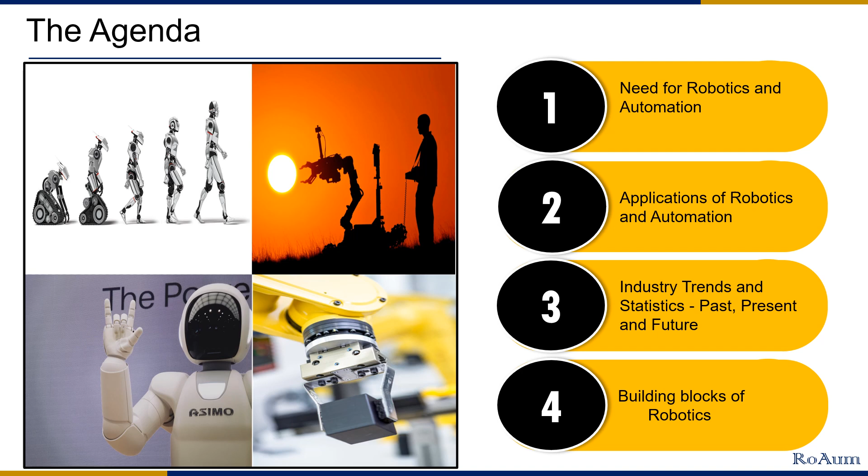Historically, robotics has been in use for automating routine or repeat jobs. Repeat jobs basically involve a limited set of operations that as a whole are repeated over and over again for a long period of time, for example, assembling parts of a vehicle or a machine in a factory. These were automated to improve productivity and efficiency, reduce human error and hence reduce wastage, and make optimal usage of available resources, infrastructure and investments.

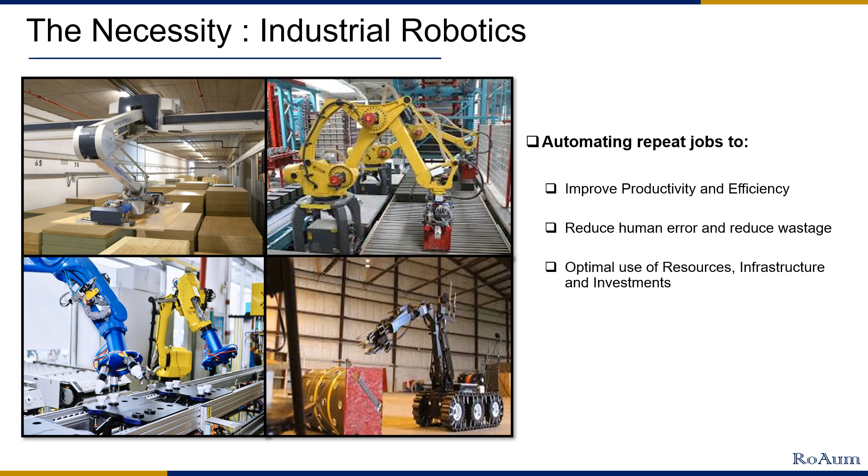Automotive industry is an early adopter of automation and robotics. The main applications are welding of auto parts in assembly lines, painting for getting consistent finish and also for handling highly toxic chemicals in paint, moving heavy and bulk materials inside the factory, and assembling of pumps, motors at high speed on fast moving assembly lines.

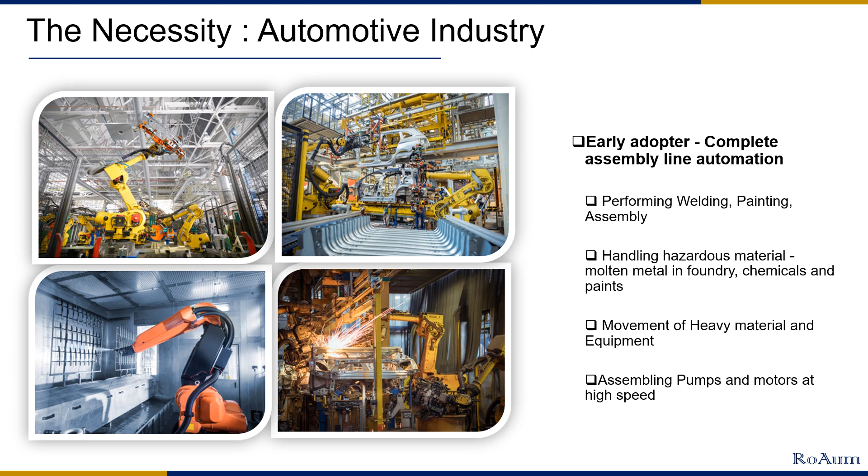Industry 4.0 is an extension of the earlier automation effort, and it is a step towards going beyond complete factory automation, where the manufacturing plant is highly integrated with business systems and analytics using process automation, IoT and cloud computing.

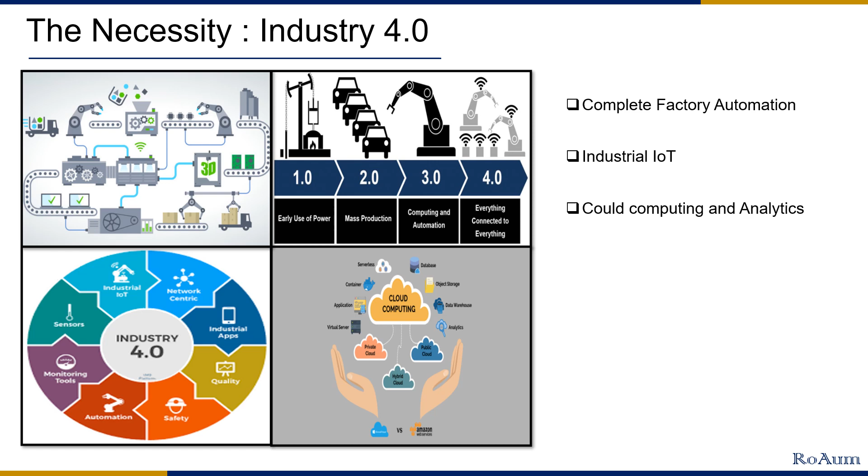The key principles of Industry 4.0 are interconnection of various entities in manufacturing, that is machines, human beings and systems that constitute the traditional assembly line; dynamic collection, dissemination and processing of data and decision making; reducing human intervention in decision making for routine activities, while human decision making is used in critical and important decisions. Robotics and automation forms an important pillar on which Industry 4.0 is built.

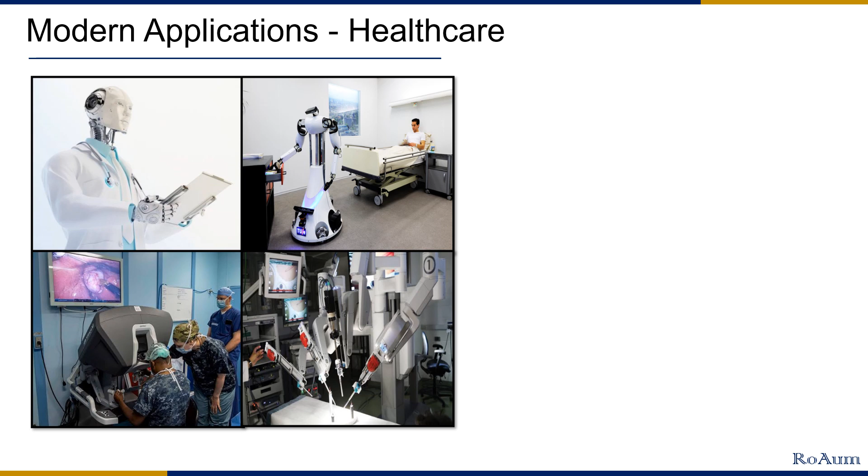The more recent and advanced use of robotics has been to augment and enhance human abilities and skills. For example, in healthcare and medical applications, assistant robots are being used for high precision procedures like minimally invasive surgeries and biopsies. Telepresence and robotics is used to examine and test patients in rural or remote locations.

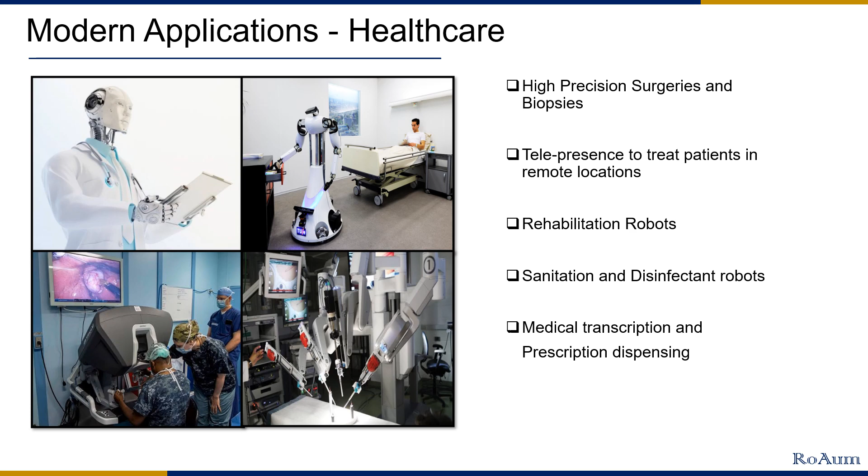Rehabilitation robots are used to improve the quality of life of the disabled by providing assistance in mobility, strength and coordination, whereas they are used to help the elderly in assisted living. Sanitation and disinfection robots are employed to combat the increase in antibiotic resistant bacteria and outbreak of deadly infections like Ebola, Corona and H1N1. Robotics is also being utilized in medical transcription and prescription dispensing systems.

Robots are also being employed in education, for example, to bring school to students who cannot be present physically by creating virtual classrooms, and to train medical students in performing complicated medical procedures where using a human subject is not feasible. Robots can be created and programmed to exhibit all the indications of human life, including breath and heartbeat.

There are simulators to provide exceptional crisis and disaster management training for emergency response and law enforcement trainees, and driving simulators for creating what-if scenarios which can help student drivers prepare for real-life hazards and obstacles on the highways. Humanoid robots and social robots such as robotic pets can be programmed to teach communication and social skills for children with autism, developmental disabilities, and attention disorders.

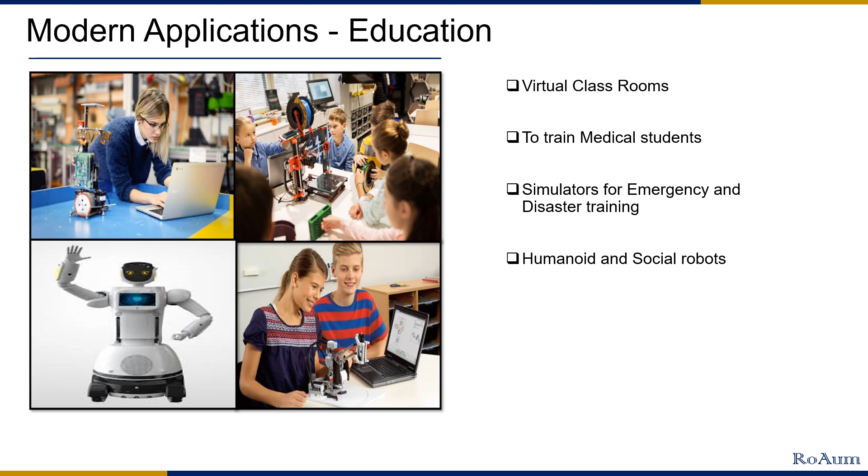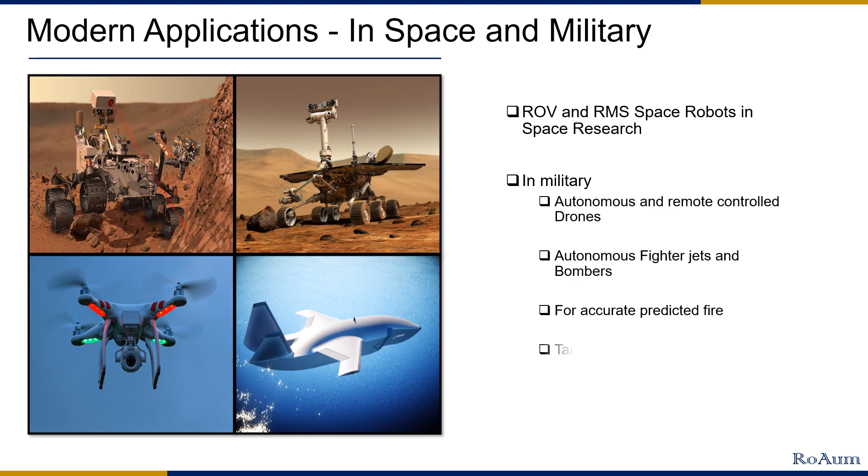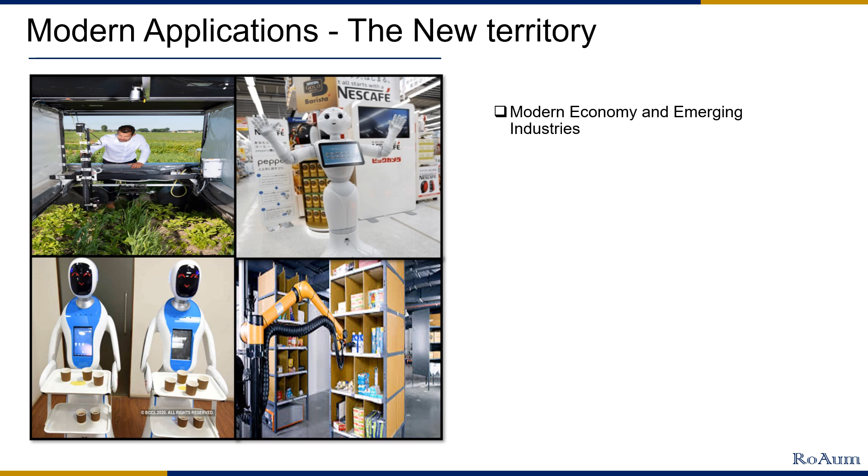Some of the new age businesses and industries need the use of robotics and automation to achieve scalability. For example, e-commerce industry uses robots for sorting and packing of orders. In the manufacturing of electronic equipment, the mass testing of electronic devices and gadgets is automated using robots at the manufacturing plant. Also, the testing of modern, highly user interface and user experience driven embedded systems is automated by employing robotics and automation.

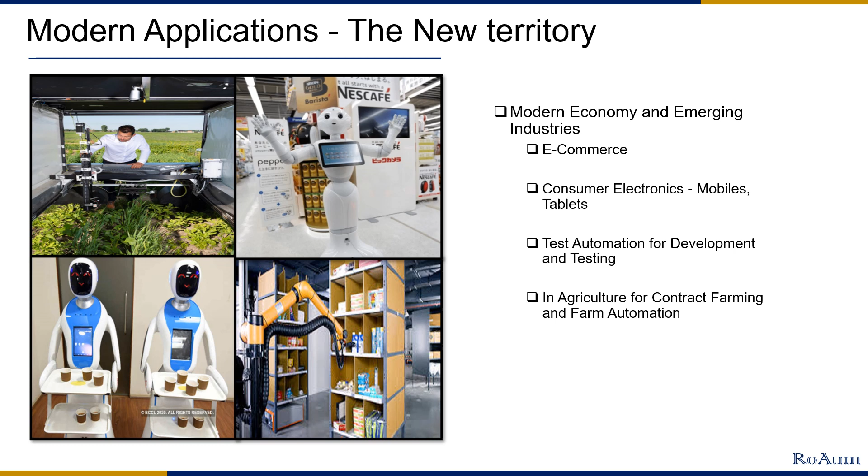Automation and drones are being employed in agriculture as well. For example, contract farming and farm irrigation are being automated, whereas drones are being used in weather, soil condition, and crop health monitoring and management. That brings us to the end of this video.